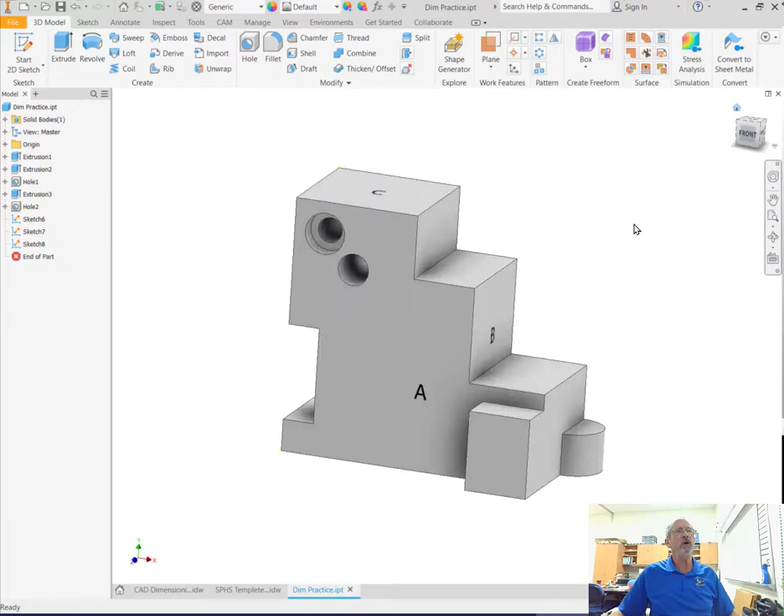Now, when we do datum dimensioning, we want a primary datum. So this bottom line here is our primary datum. That's the line that we always come back to when we dimension. And we're going to do what we call datum dimensioning here. Datum dimensioning is much more accurate than what would be called chain dimensioning. Chain dimensioning is used quite often in civil engineering and architecture, and it's one dimension right after the other.

But it's not nearly as accurate because if you continually go on the plus side of your tolerance, you're going to wind up with a piece that's too big. Likewise, if you keep going to the negative side of your tolerance, you're going to have a piece that's going to be too small. So this is going to be that.

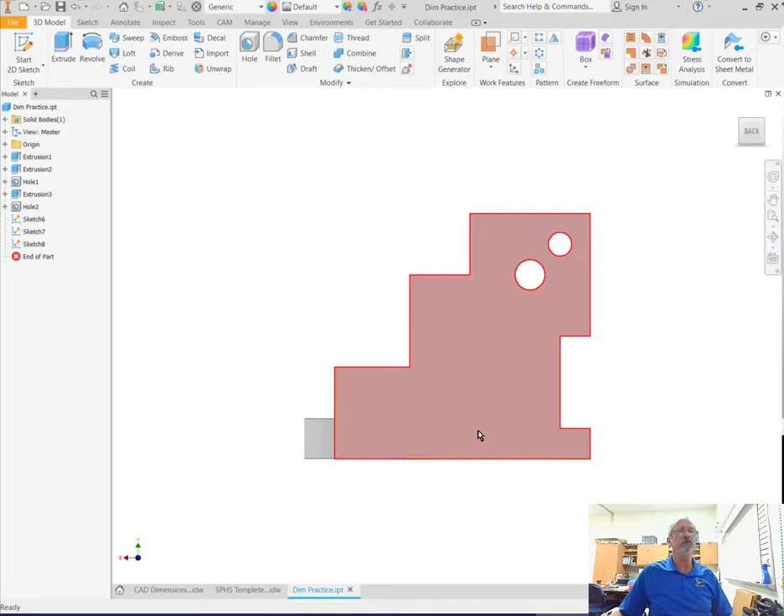So which view is our front view? Well, here, this shows some pretty good shape right here. And that shows some pretty good shape right there, but not near as much as the other view. And when we come over here, this shows just as much shape as the other one, right? So wouldn't that be the front view? And here, this is not near as much shape. So should we go with side A, which is here, or should we go with this backside right here?

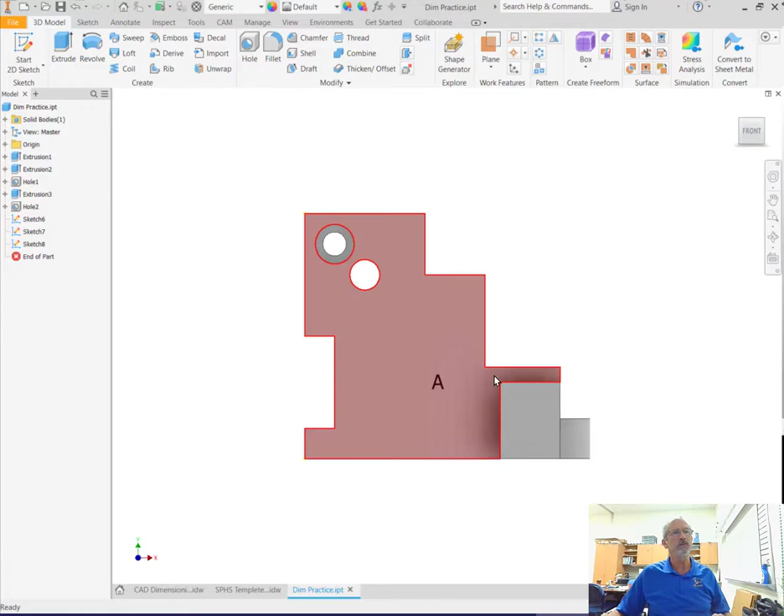I'm going to say that when we take a look here, if we're always judging things off of basically the front, the top, the right side view, unless there's really a reason, this takes us in a natural resting position. It's the largest area. It shows the most contour, okay? And it shows this piece on the front where the backside does not show it. It also shows the counterbore of this hole, which the backside does not.

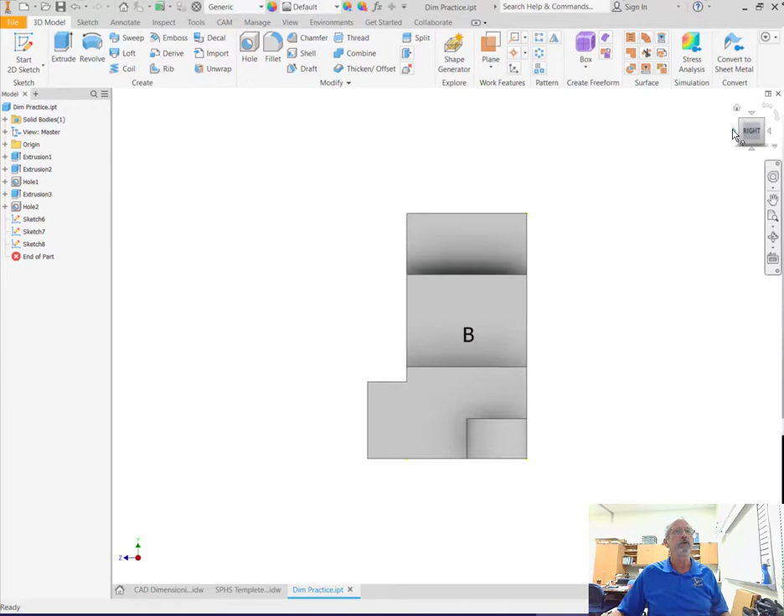But it does one other thing, okay? When we go to the right side view, we have very few hidden lines. So when we go to this view right here on the back side, if we went to the right view of that, we would have a lot of hidden lines over here. So that's why we're going to go ahead and select this as our front view.

It's a really good reason to take that as our front view right there. So let's go into our template here, and we're going to go ahead and do our base view here, and we're going to bring that in. And what I'm going to do is I'm going to go ahead and place the top view, and it really doesn't matter where we place these.

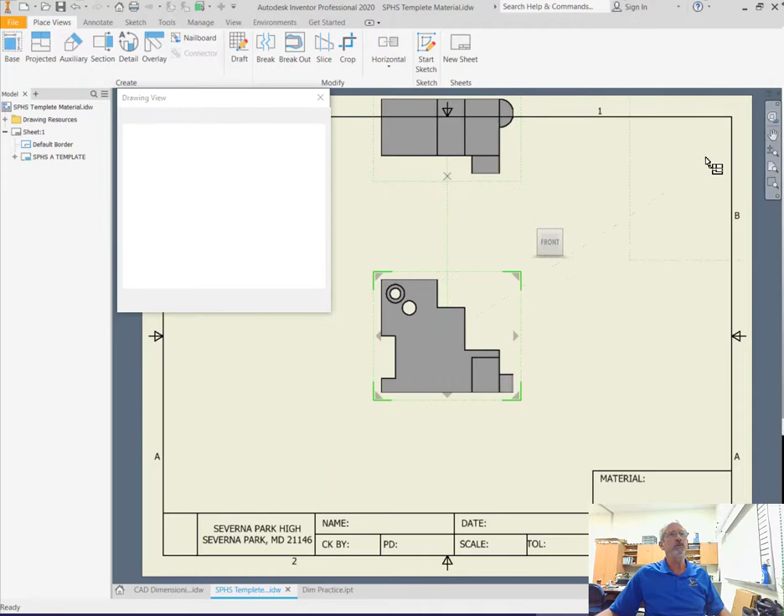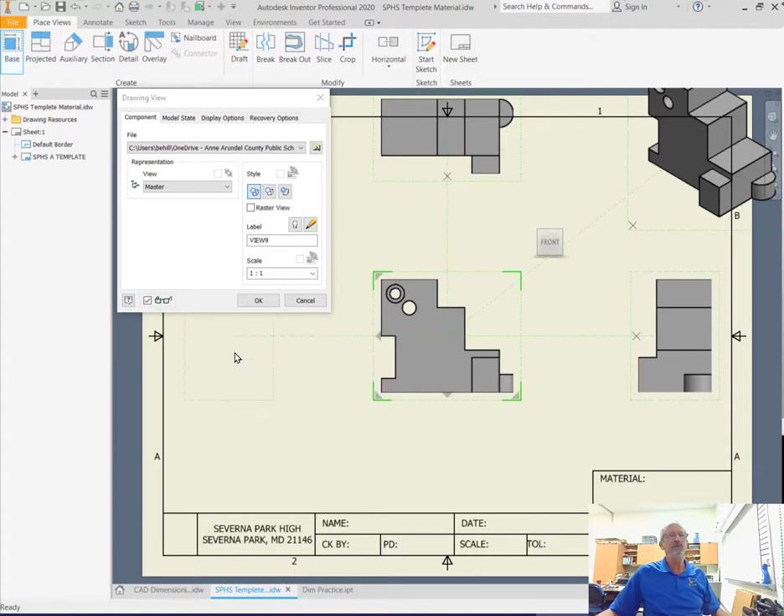Notice we're going to do a top view, an isometric view, and a right side view. And notice how Inventor allows us to do that. Now, I don't know whether it does that with Pro E and with SolidWorks, but with Inventor, it's really pretty cool. All right, so we're going to drop those in there, and we could do a left side view if we needed, or a bottom view if we needed. We're not going to need those for right now. Let's just put these three basic views in with the isometric view and click on OK.

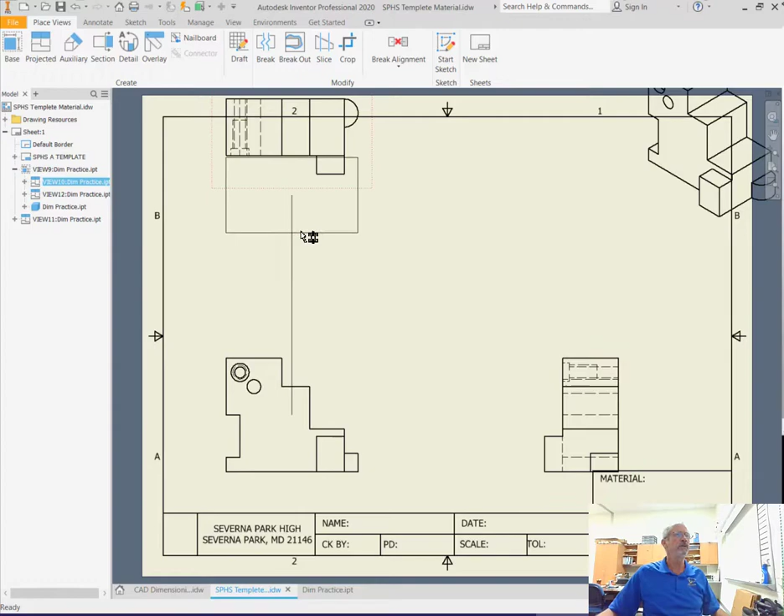All right, now once they're all in here, the master view is the front view. That's the first view that we put down. Now you can see here, because I've got my materials here, I can move up and down with my top view, but not left to right, because the master view is the front view. And the same thing with the right side. I can move it left and right, but I can't move it up and down. So we're going to have all the dimensions that we're going to need here. This is going to be kind of tight.

So what I'm going to do here, I'm going to bring this isometric view in here, and actually I'm going to leave it out here a little bit. But I'm going to get these red marching ants around here, and you can see where my cursor also switches to a cursor with kind of 4 funky squares on it. I can right click on that when I get to that point, let me get in here again. I can right click on this and I can edit this view.

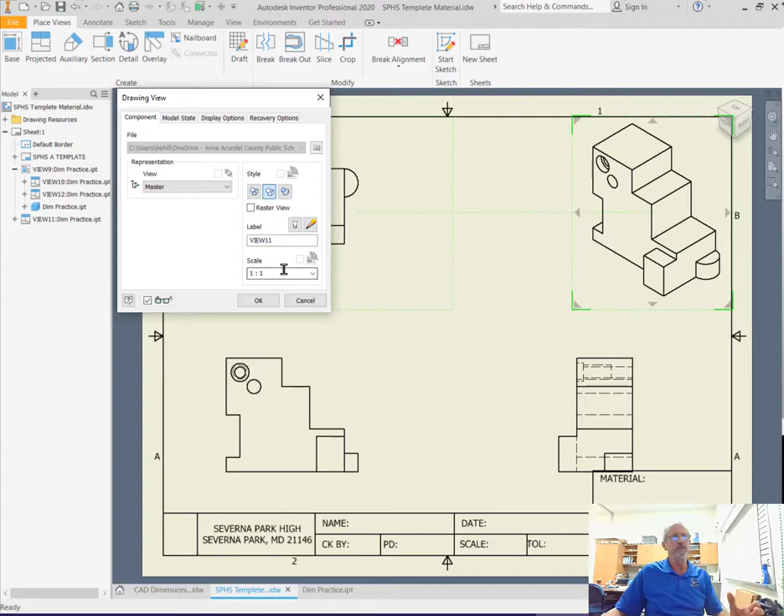Okay, so with edit the view, this is pretty dominant right now, and really the manufacturer doesn't need to see that, so I'm going to make it 3/4 scale. And just for kicks and giggles, I'm going to go ahead and make it shaded, because sometimes it just gives it a little bit more contrast and you're able to see that. So we're going to pop that up here, and I'm just going to leave it here even though it's overlapping. We should never overlap that border area, but I'm going to make this into a B-size sheet of paper.

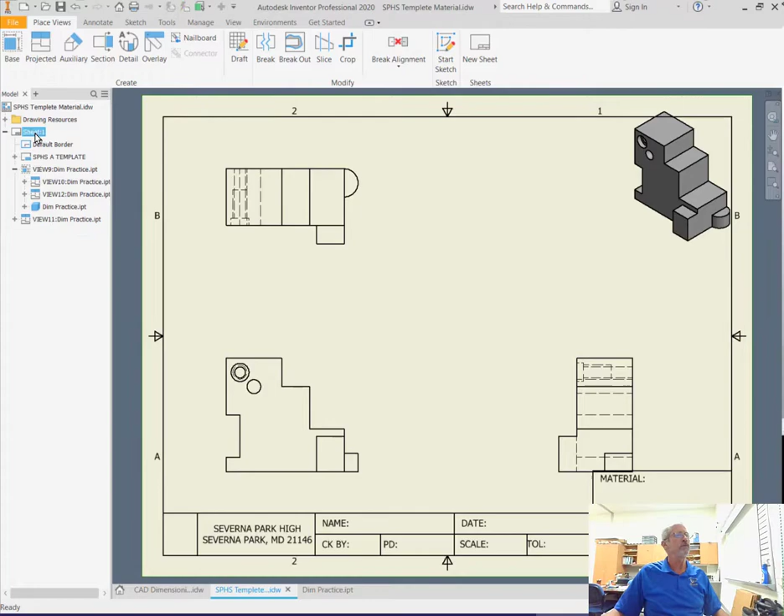So we're going to go up to sheet 1. I'm going to right click on sheet 1 here in the browser bar, and I'm going to go edit sheet. And I'm going to change this from an A to a B-size sheet of paper, and I'm going to click on OK. Now we can bring that up.

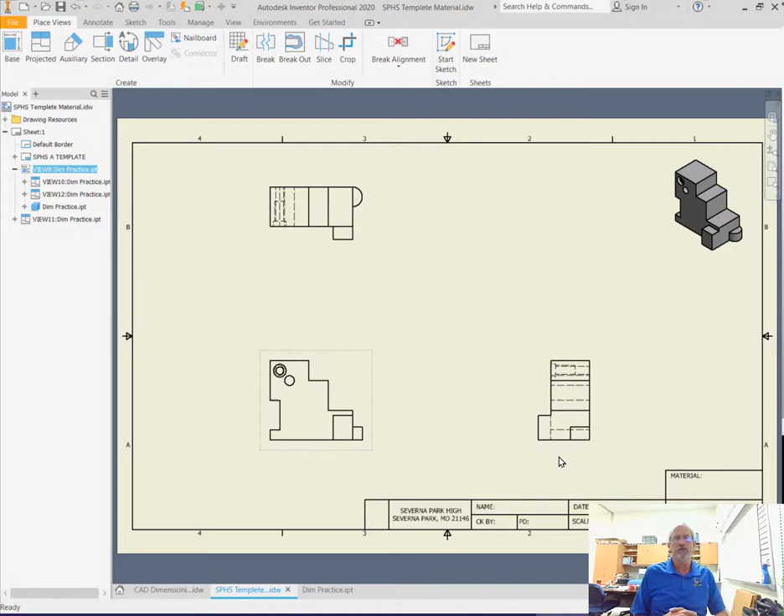Now, when we're drawing in industry, we always draw full scale or larger when possible. Now, it's not always possible that we draw full scale or larger. Obviously, if we're drawing a car engine, it's not going to fit even on an E-size sheet of paper and still get all the dimensions in there and still get all the other views that we need. So we have to scale that down. And sometimes that's just what we need to do.

All right, so the first thing that I always tell all my students to do is that you need to add your basic annotations first. Now, if we needed to, we could alter these views here. We can change these back and forth. We can delete these. We can even come in here and edit this view here. And when we edit that view, notice that the view cube comes back up here, and we can change this sucker all the way around, all over the place if we wanted to. All right, we're not going to do that right now because we've got to set it up.

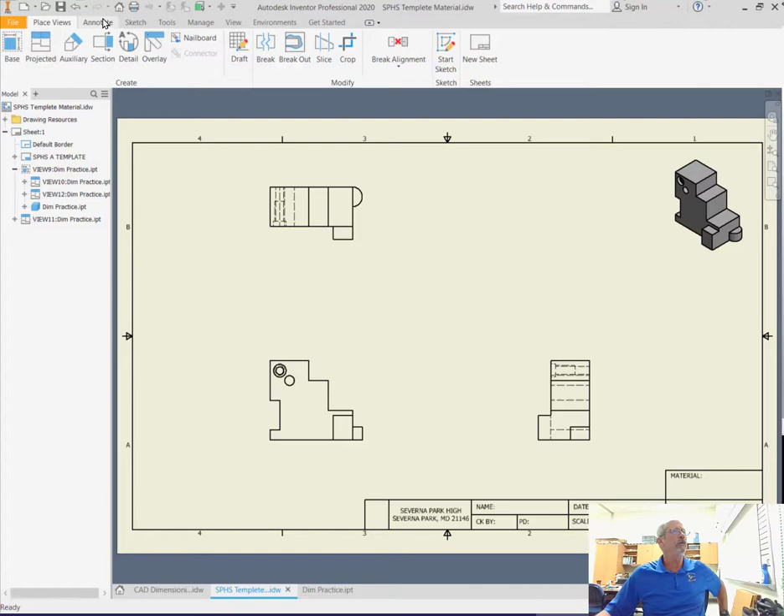So up here on our menu bar, we're going to go to annotate, and it's going to bring up a new set of ribbons and new panels up here. So we have a whole bunch of different panels up here that we can do a lot of different things with, which is pretty cool.

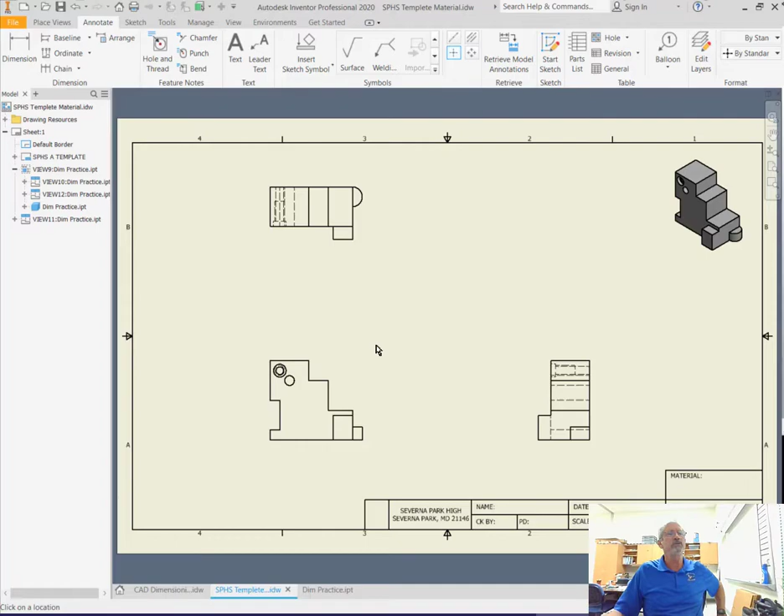But here's our basic dimension tool, and we have some other annotations up here. I always start with my students: always, always, always add your center lines first. Okay, so I'm going to zoom in here. Now, one of the things you've got to be careful with when doing the center lines is that your center lines always go an 1/8 inch past the object.

So if you take the center line piece here, notice that I went to the center, but it's not going outside this diameter right here. Okay, so I'm going to undo that, Control Z that off. Because that didn't go past that 1/8 of an inch, we need to come back in here. And remember, Control Z is your friend. Control Z is undo. If you hover up here, you can see Control Z is the hotkey. It's always in parentheses there, right?

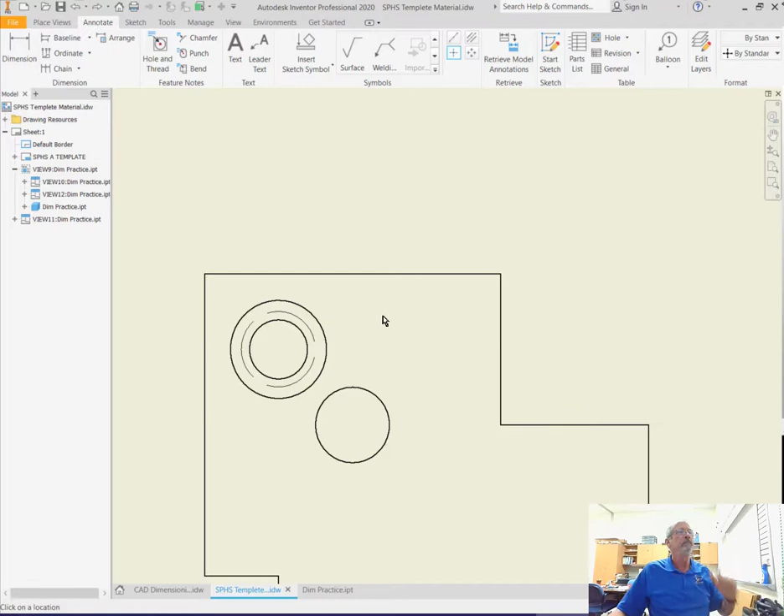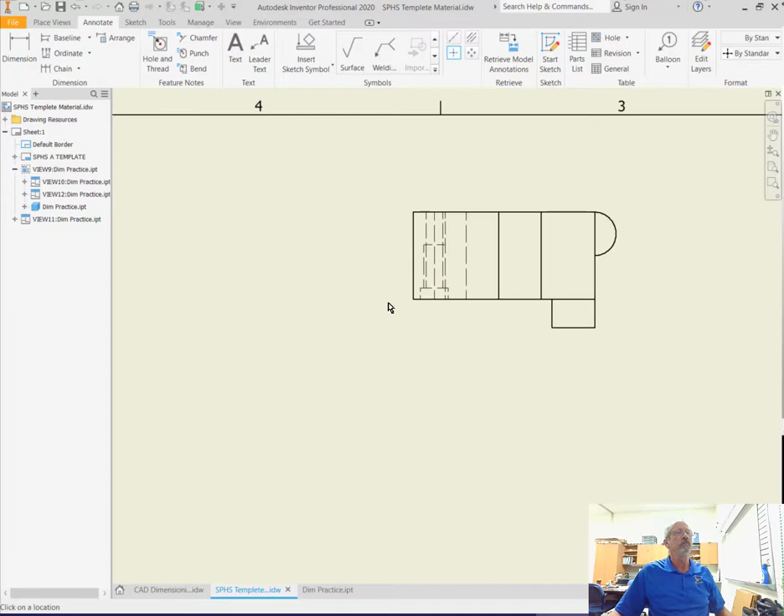So I'm going to come back over here, and I'm going to touch the outside of this circle right here. And now notice that the center mark comes outside of that outermost circle. And I'm going to do the same thing here. Notice that this is a little bit different only because this is a fairly small circle. Okay, now we also need to go into the other views and put in our center marks in here.

Now here we've got one coming right down through the center. Notice that we've got a hidden line. Well, a hidden line takes precedence over a center line. So we're going to leave that one alone, but we do have a center line that's going to go through here. And we've got to make sure that we do the right thing on there, so we've got to make sure that we select the correct lines.

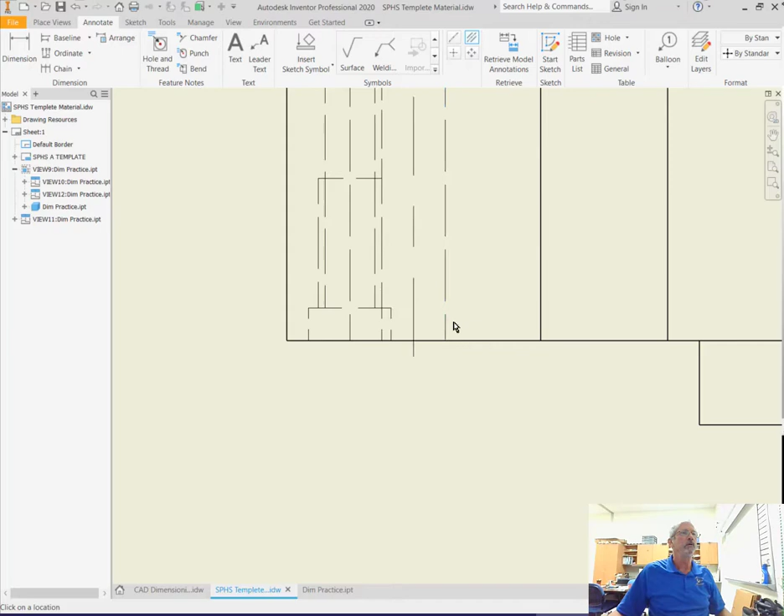Now, one of the ways that you can select the correct lines here is that you know that these kind of line up a little bit together. So we're going to go here, and here, and we're going to put that center line right on down through that slot right there. Okay, now I'm going to exit that. I'm just going to make sure this did not get pulled up all the way, so I'm going to pull that up an 1/8 inch past the object. Remember, the center lines always go an 1/8 inch past the object that it designates.

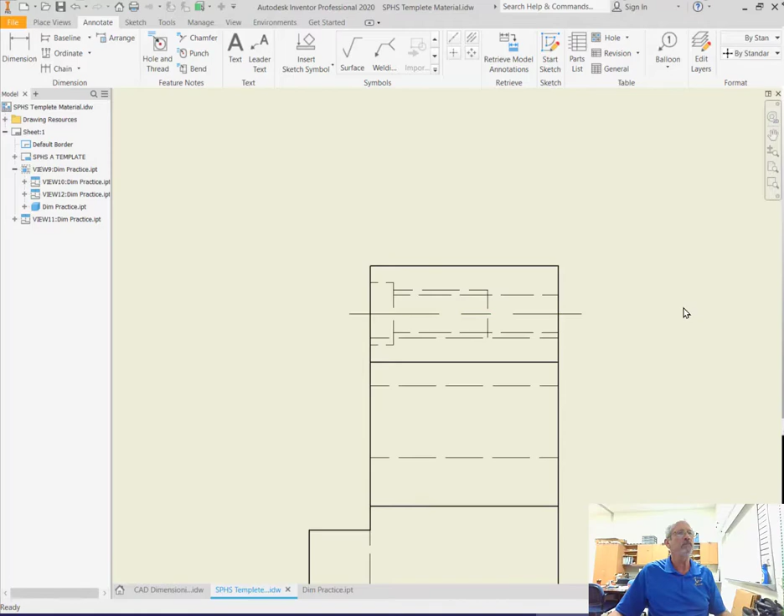So I'm going to come back in here with this centerline one. I'm going to go to the inside because this will allow me to get that center line at least out here. I'm going to escape that tool, and again, I'm going to pull this out 1/8 inch past that object, or about that. You don't need to make it exact. Back in the day when we used to do this by hand, we weren't really worried about that.

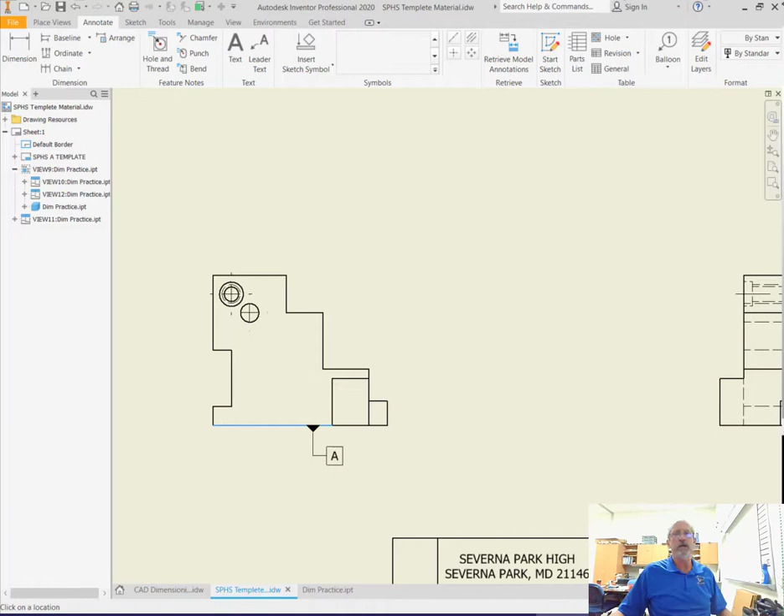Okay, so we always want to start off with our primary datum. Now, if we really wanted to, in the real world, we'd come in here with a datum, and we would come down here and say, okay, this is going to be our primary datum, and we could drop this in here and say that is our datum A, all right? And we could come over here and bring this in here, drop that into place, and this now becomes our datum B, and we could click OK there.

And then we would come up here, and we try to put it in a place where we don't have to worry about it too much, but we would drop this into place, and this would become our tertiary. So we've got our primary, our secondary, and our tertiary datums. And this just allows us to work off the correct datums and to make things very accurate. You don't have to put those in there for something as simple as this, but it is good practice.

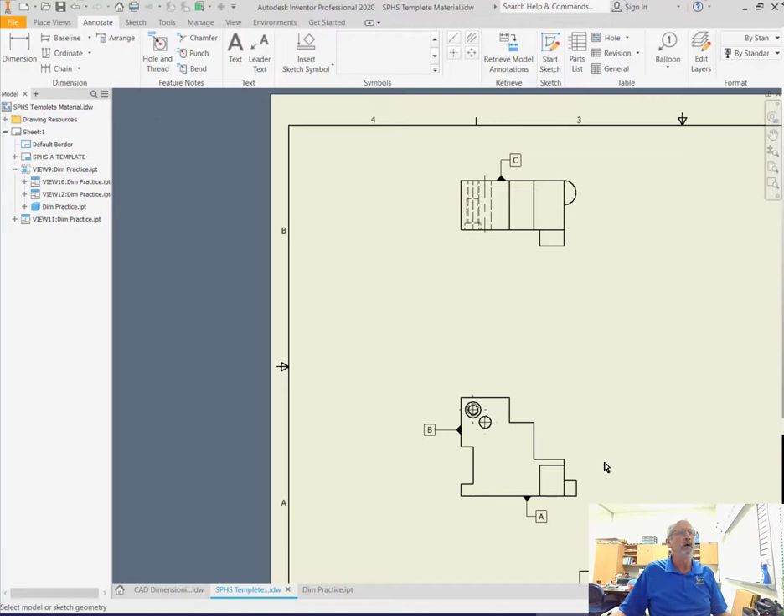I'm going to show you two different methods of putting in datum lines here. I like to start off with my primary datum. And when we do that, what's really important is to understand that we're always dimensioning in between views when possible, but we're also dimensioning to the shape, which is more important than dimensioning in between views.

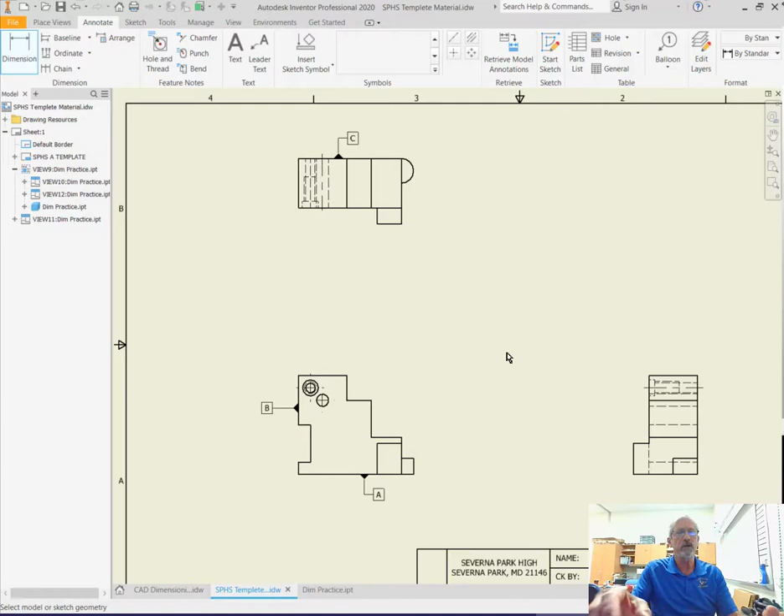Now, when we consider in between views, even if we have a left side view, a bottom view, a back view, we're still trying to put our primary dimensions in between the front, top, and right side view. In between the top and the right, this is considered in between views. It is not considered dimensioning in between views to the left of the top view or to the bottom of the right side view.

Okay, so I've got my dimension tool here, and the first thing I'm going to do is come into this object here. You could always start off with something a little bit simpler than this, but there's a couple of different methods. Now, we have to be careful that you're not getting the midpoint right here. See that little green dot there? It's a node. We've got to be careful that we don't pick that up.

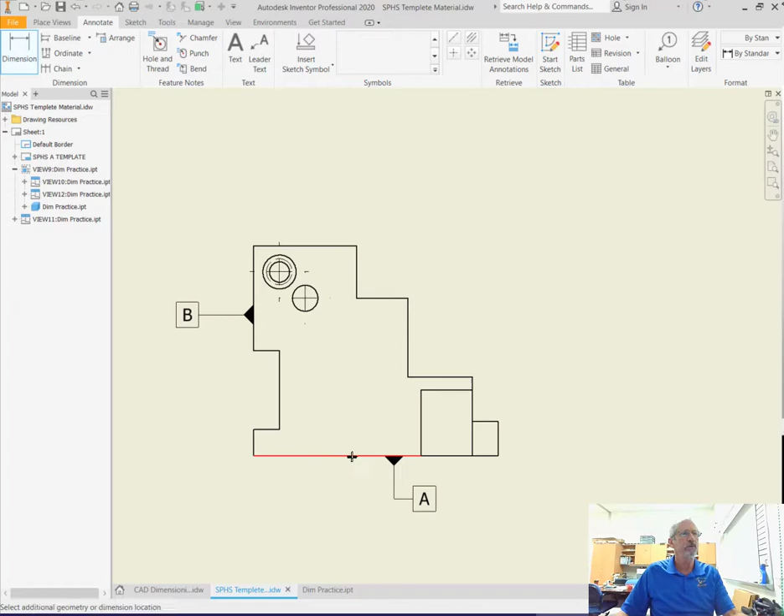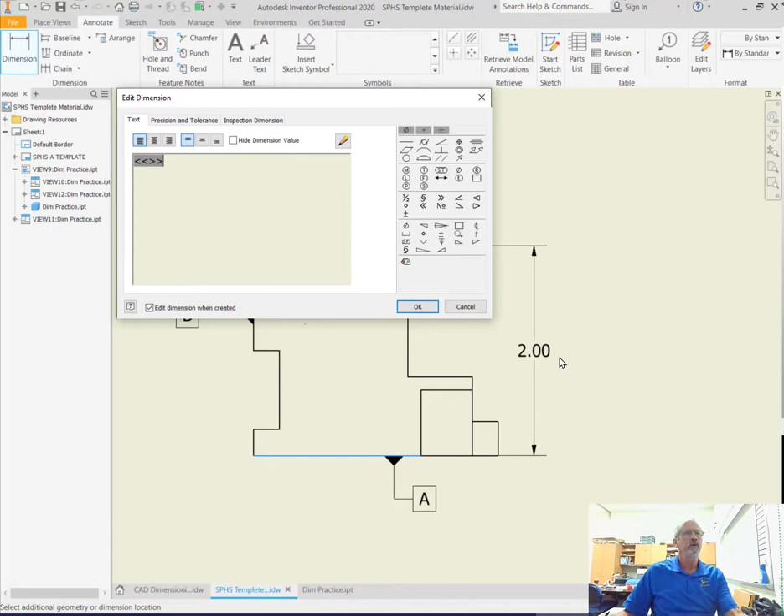I'm going to do something wrong here so that you can see what happens, and then I'm going to do it correctly. So if I click over here, notice that it starts right here, and then if I click up on this line and bring this out here, I usually come out 2 snaps. There's one snap, there's a second snap, and I drop that into place. It gives me plenty of room for my numbers on what we call a unidirectional layout of our dimensions. Unidirectional means all dimensions are read from the bottom, and I can just click OK here.

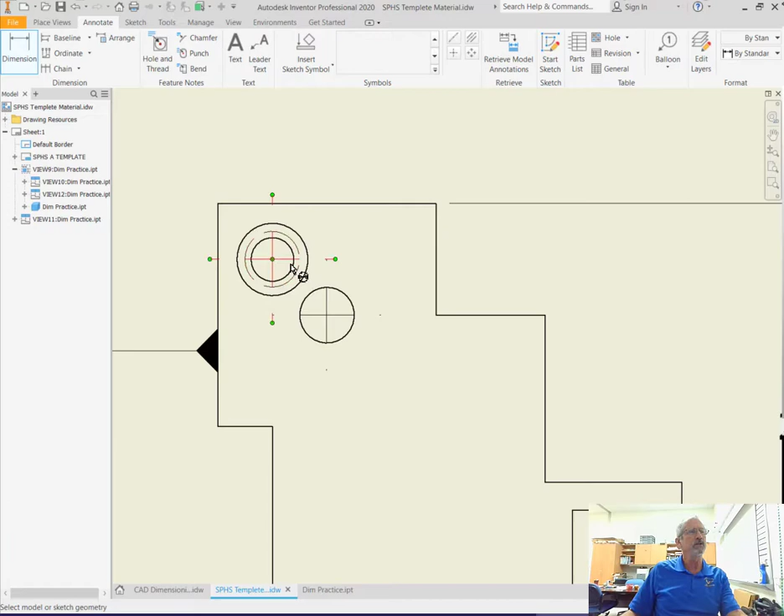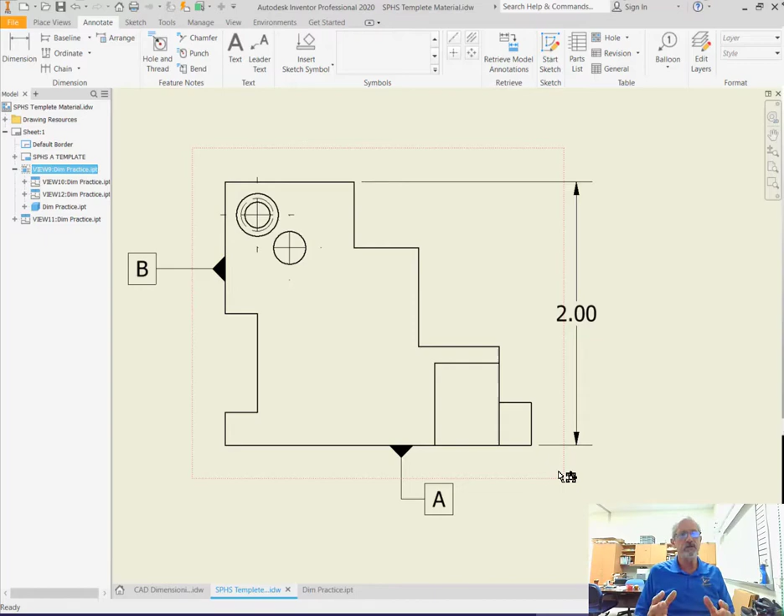But here's our problem: the extension line should always be 1/16 of an inch away from the object that it is dimensioning. Notice down here that didn't happen. We can take care of that by selecting the object. We have to escape out of the tool, then select that particular dimension, and drag and drop it here. Now notice I've got the 1/16 inch gap right there. That makes it much easier so that we don't confuse the object with the extension line, and it really helps out the manufacturer.

Remember that these drawings are not for you at all. If the manufacturer doesn't make what you want, then it's your fault that you didn't do a good enough job of doing the drawings, the design, and laying these dimensions out.

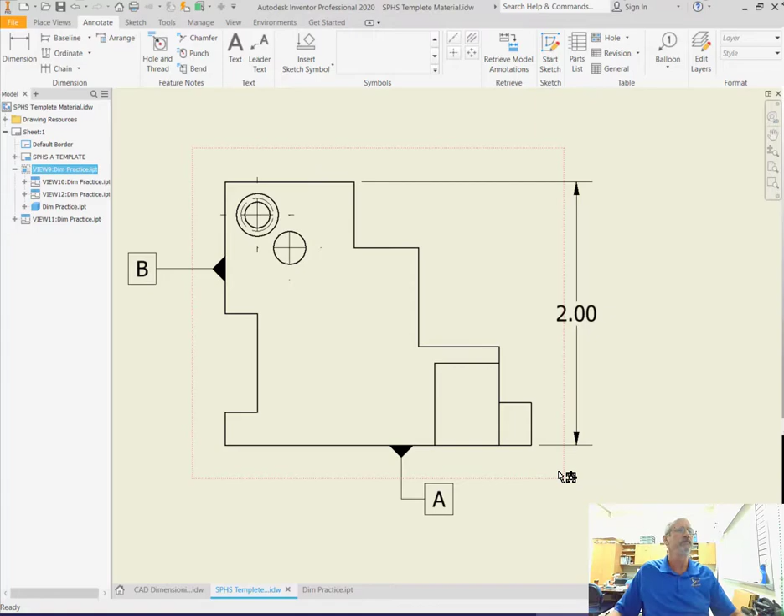I'm going to delete this and show you another method. Because this has just a straight line here, if I just get this line red, it's going to dimension just that line. I've got to be careful that I don't go for that center point there. But I can bring this out here and drop it just like that. So that's one way. The other way is I can start here. Notice that dimension was on the bottom.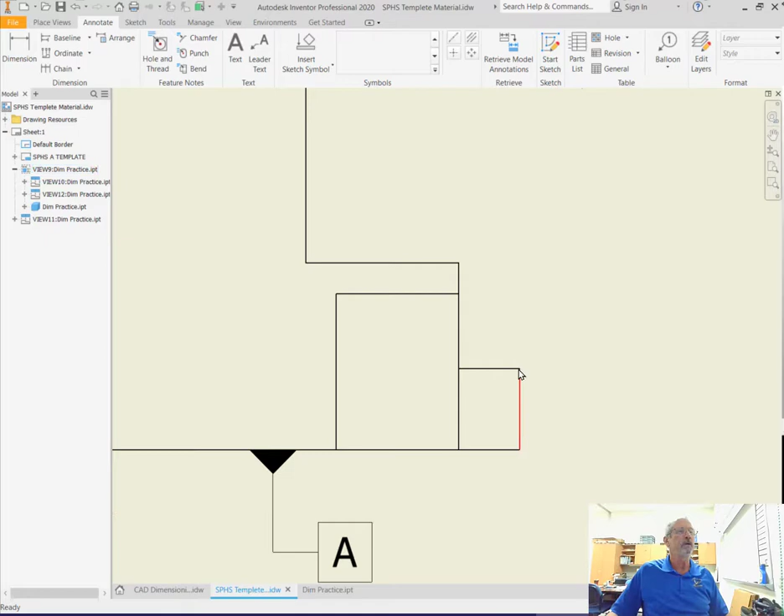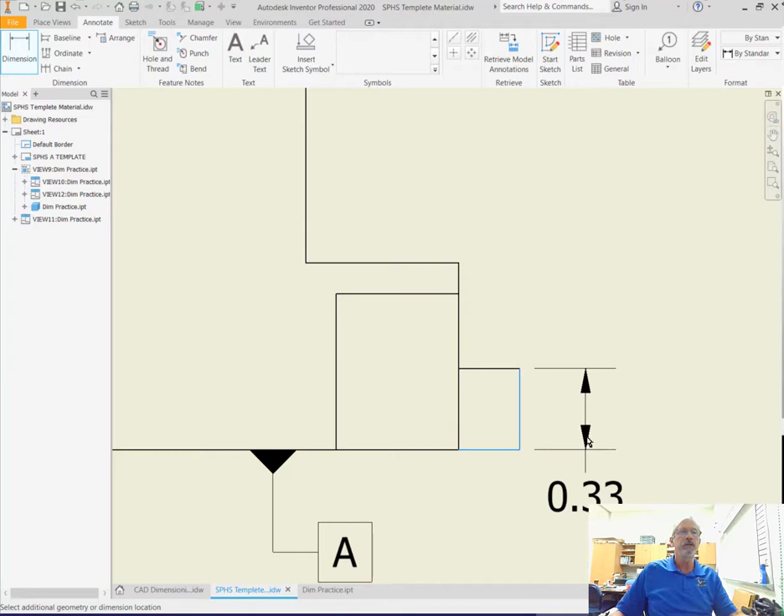If I go from corner to corner, notice that I started on the top line, and that dimension came on the top. If I do that again, and I can hit the D key to do that as well, that's a hotkey, notice that I started at the bottom this time, and the number came to the bottom. So again, just hit the D key. Notice that popped up right there.

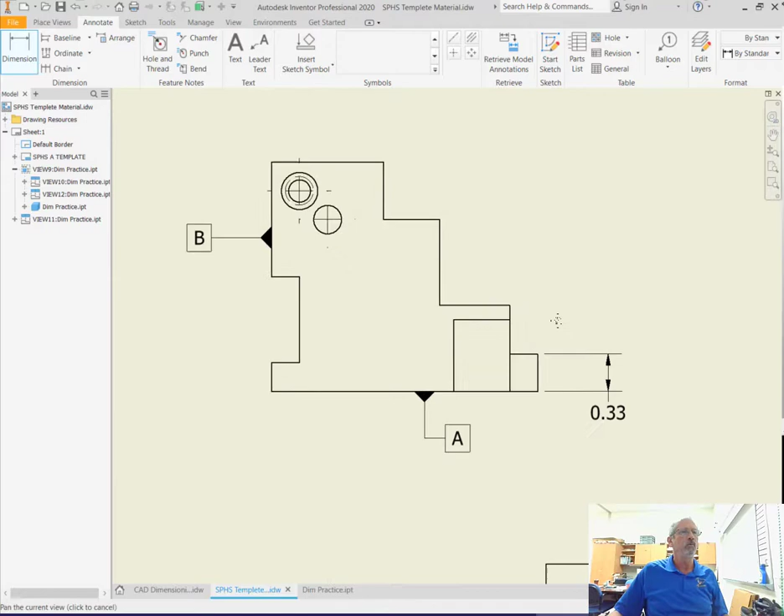I hit my keyboard. I'm going to come out 2 snaps here. That really gives the manufacturer room to see what's going on. This is really important when you're working with somebody. You don't want to get a call from the manufacturer late at night. So I always start off with my detail height, and I go very systematically: detail height, overall height.

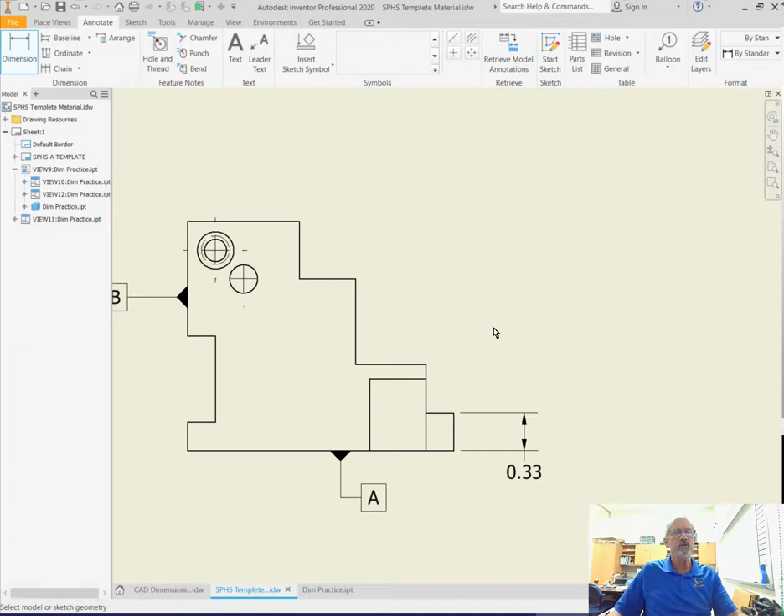So I always do my heights first, and then I go to my secondary datum, which would be my widths, and I'm going to do my detail widths and then my overall width. And then I finish with the tertiary datum, which is the depth.

Okay, so here what we're going to do is we're going to say to ourselves, okay, so what's the first height? There's our first detail height right there. All right, what's the next detail height? And we've got to zoom out a little bit on this because we've got to remember that our front view gives heights, but also our right side and left side view give heights. So we have to make sure that we're deciding on which is the best views to do those heights with.

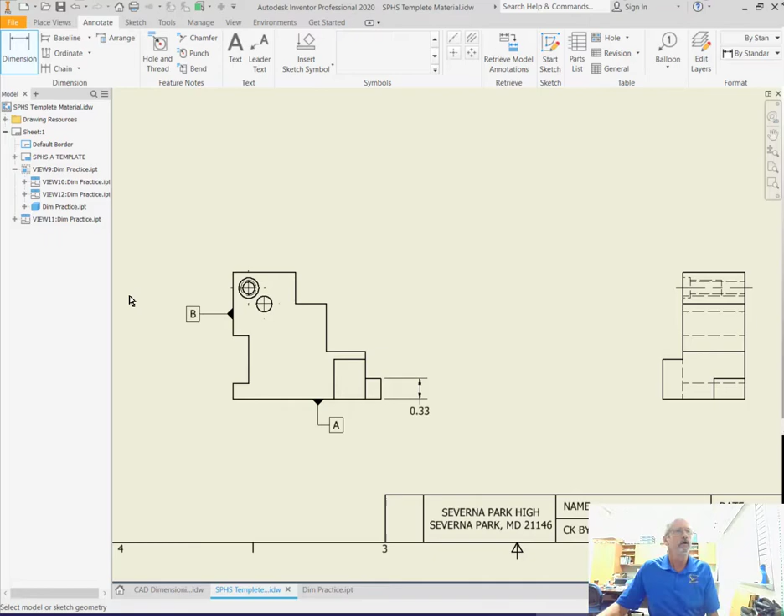Okay, so our next highest thing that we're going to do is going to be this piece over here. Well, this is over here. And I'm not going to bring that dimension over here, which, although it's in between views, the shape is over here. So I'm going to move over here, and I'm going to bring this over, and I'm going to come out 1 snap, and there's my second snap. I'm going to drop that into there.

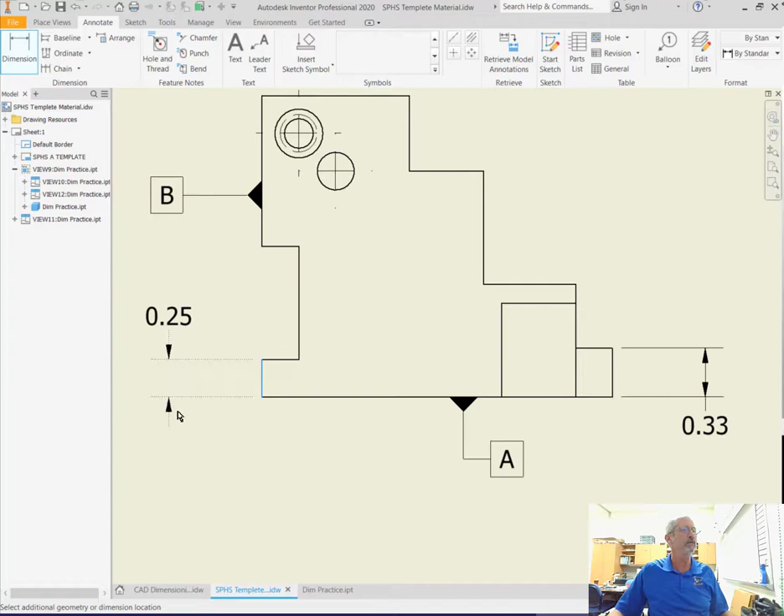All right. Okay, so now we have this part of the object right here, a rectangle right here. Now, the thing is that when we take a look at this rectangle right here, does it go in or does it go out? Well, we can see from the top view that it comes out, and we can see from the right side view that it comes out. Is there shape here? It's a rectangle. But again, we don't know whether it goes in or out. If we come over here on the right side view, we see that this comes out.

So what we're going to do is we're going to dimension this height over here. So 1 snap, 2 snaps right there, or marching ants. Okay, I like to call those marching ants. So that puts that into there. So now we've got that detail height right there. We're going to move up to the next detail height.

And again, we look over to the right side view, and really this is going to be our best view here. So here we're going to go from corner to corner. And this is, again, where you've got to be careful that you're not coming down here to this corner because you're going to lose that gap. So you're going to come to the outermost corner. All right, and again, I'm going to go 1 snap, 2 snaps away.

And the default for Inventor is to go 1 snap away, but the problem is if I made this a default of 3 decimal places, which is pretty standard in industry when we're dealing with inches, then there wouldn't be very much room for the dimensions to go in there, and it would make them too jumbled. So I like to go out 2 snaps.

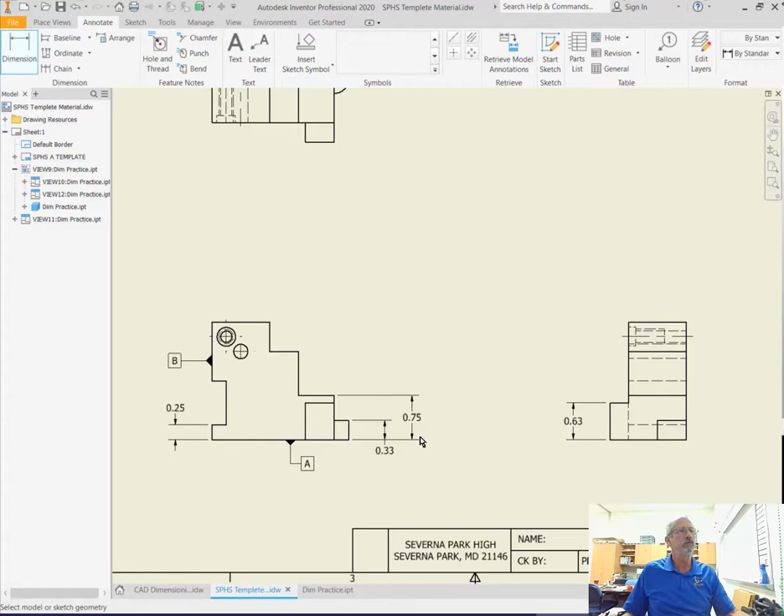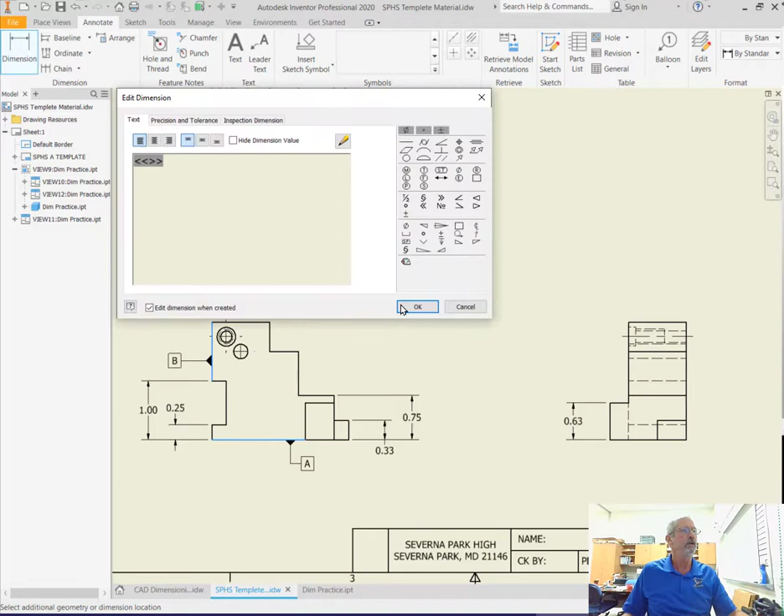Okay, next height, we're looking at both views. Next height is going to be this piece. And this piece, again, we're going to dimension from this corner to this corner. We're going to bring it out, and we're going to bring it out 1 snap past that point. So you can see here, just 1 snap, you can see how those 2 overlap, right? So we're going to go to a second snap right there and drop that into place. All right, we're getting there, aren't we?

All right, so we're going to come back in here. We've got to be careful because we've got some other things here. Now, we've got these 2 right here that are the same height. So what I'm going to do is escape my tool. I'm going to grab this node, and I'm going to bring it over to within a 1/16 of an inch here. And I'm going to just slide this out here a little bit too so that they can see the center marks a little bit better. I really don't like how this got set up there.

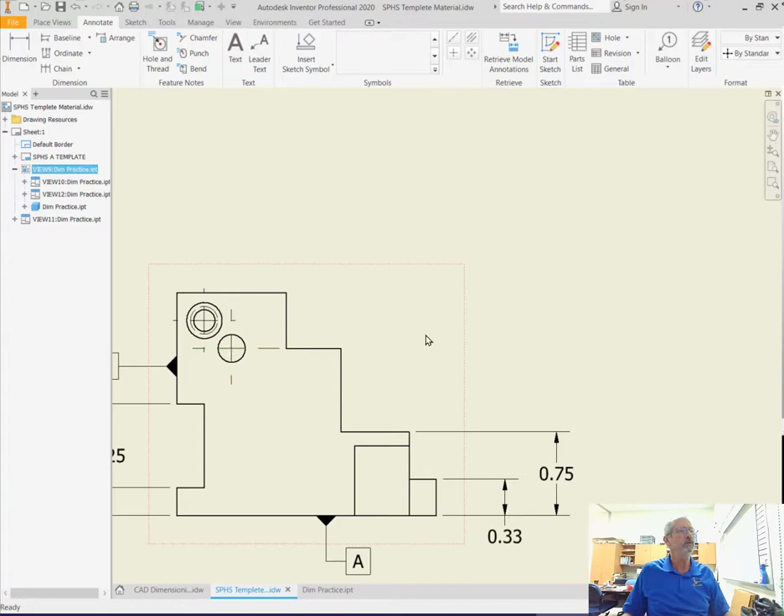But you can see how the center mark comes out, and it stops right here at this object line. And by leaving it a 1/16 of an inch, what it's saying is that, hey, these 2 line up together. They are in line with one another so that we can dimension those, and they will have the same dimension. And right out, we're going to go 1, 2 snaps back with our 1.5. We're going to drop that into place, and we're good to go there.

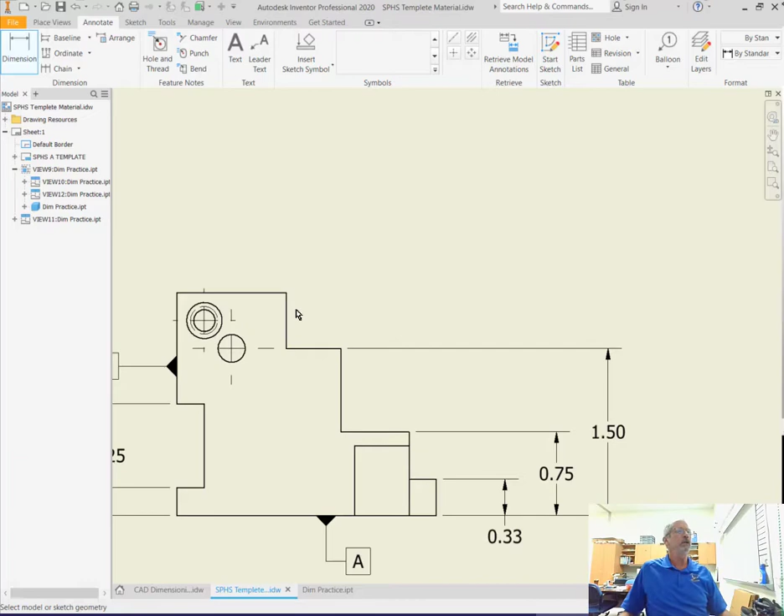All right, so now we have another height come in here. Now, this one we could either go out here or we could go over here. Now, if you come out here, technically, we should not go more than half the face of the object. So what we're going to do is we're going to bring this dimension out over on this other side right here. So we're going to start on this corner, and we're going to go to the center mark here, and we're going to drop this out over.

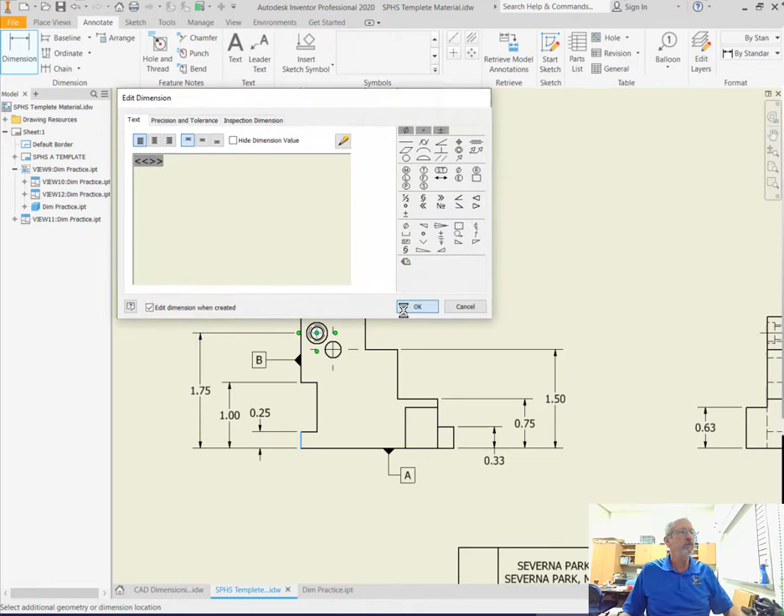Whoops, out over there. And if it drops down and you don't get it exactly right, not a big deal. You can just grab the extension line, the dimension line rather, and just drop that into place right there. And it works out really well. And you can see that I still have my datum out of the way here, and I have all those labeled.

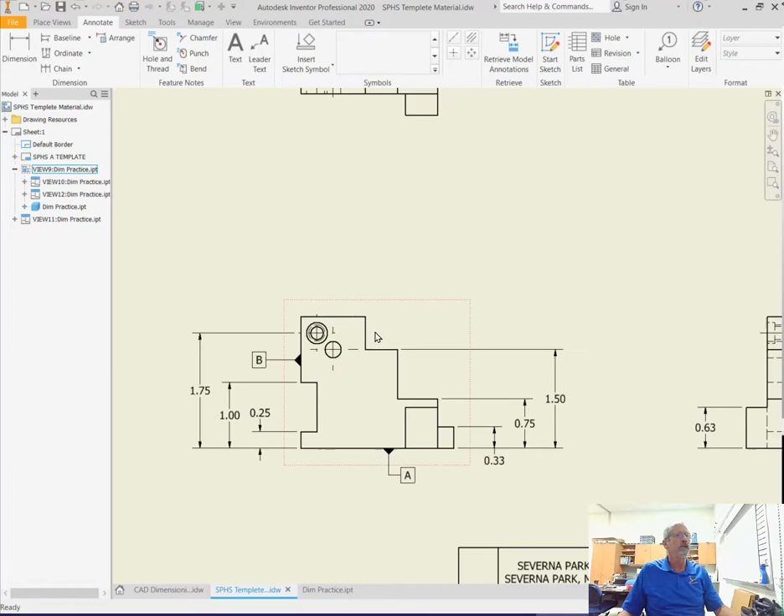Okay, so now we're going to go to our last height. That's going to be our overall. We're going to check our right side view and make sure that all the shapes are where they're supposed to go and all the dimensions are where they're supposed to go according to shape. And we're going to double check everything. It looks great. So let's go ahead and do our overall height. And we're going to bring that in, and we're going to go two snaps out and drop that into place.

And when we take a look at this, we go back and we just double check. Okay, we got height here, we got height here, but we got that over there. We got height here, we've got that there, we got height here, we've got that there. We got a height here, but that's being taken care of by this. We got a height here for our center, that's being taken care of by that.

Remember, we have to locate those centers. We have to know where we're going to put our drill bit. Our drill bit goes to the center, and so therefore it's very important to locate the center point of that. All right, so now that we have all of our heights done, we've worked off of our datum point here, and this bottom line right here is our datum line. So again, we're going up 33 hundredths here, we're going up 75 hundredths here, we're going up 1.5 and 2.

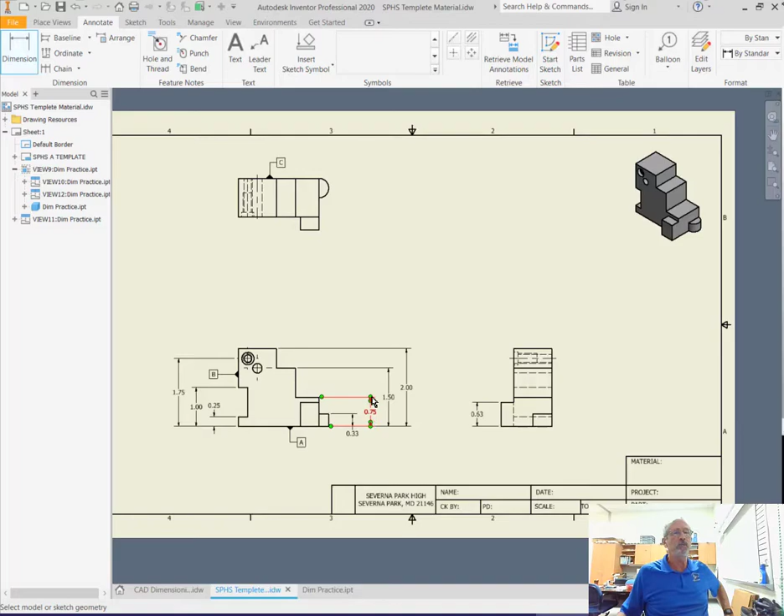And so the reason that this is so accurate is that if we're plus or minus, let's say 5 thousandths of an inch, then we're only 5 thousandths of an inch big here. If we went from this point to this point, and we were plus 5 thousandths of an inch again, then we would be 10 thousandths of an inch off. But because we came back here to the starting point and came up here, maybe we're plus 5 thousandths, now we're only off by 5 thousandths of an inch. So much more accurate than doing a chain dimension. And again, this bottom edge line right here is called our datum line.

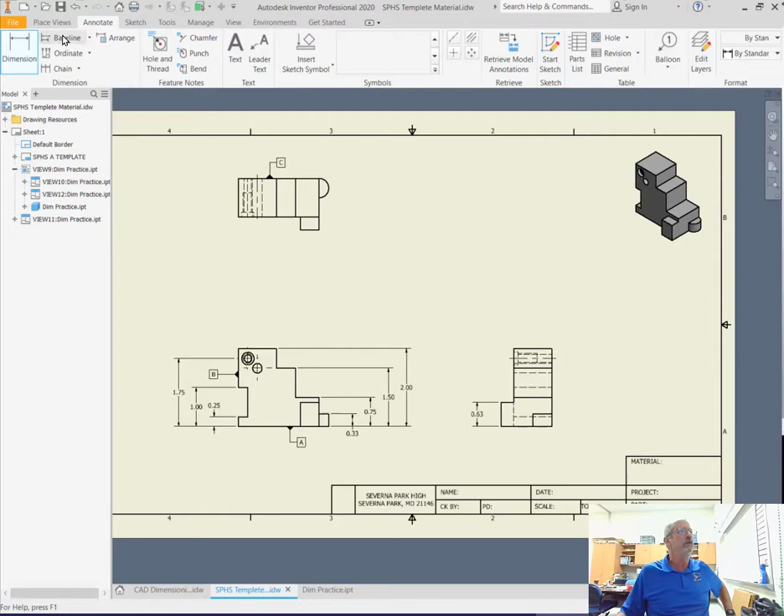Okay, so let's start another datum up here. I'm going to show you a new method that's kind of cool, and it's called baseline, baseline being the datum. I'm going to make sure that we can see the top view as well, because we're going to zoom in and out of here. Now again, we're not going to dimension this piece because we can see up here that it comes out. This is the shape up here. But all the other vertical lines, all the other widths are all going to be dimensioned down here.

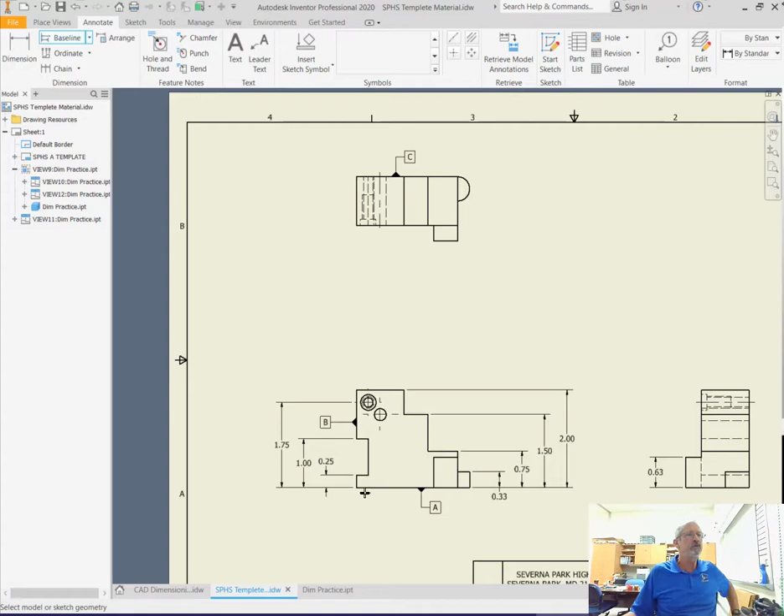Now the first thing that we see is a dimension down here. We're going to go back to our regular dimension tool because we need to know how big that slot goes in. Again, we're going to go from corner to corner, and we're going to bring this out. Notice that I started on the right side, and so the dimension stayed on the right side, so it didn't run into this arrow over here. So I'm going to drop that into place, and I'm going to click on OK.

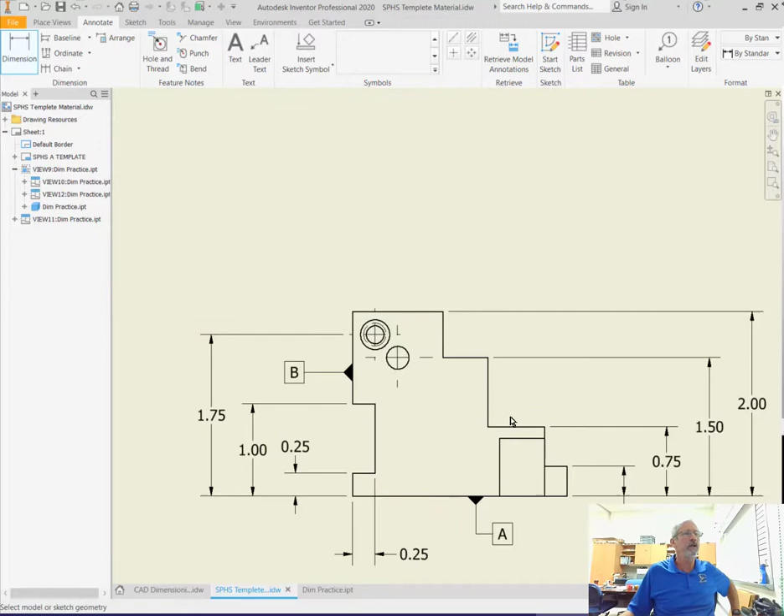And I also know that because this has got shape up here, I'm just going to come up here, click on that and come down 1, 2 on that. And we're going to click on OK for that. Okay, so now all the rest of these lines I can come over here and take care of here.

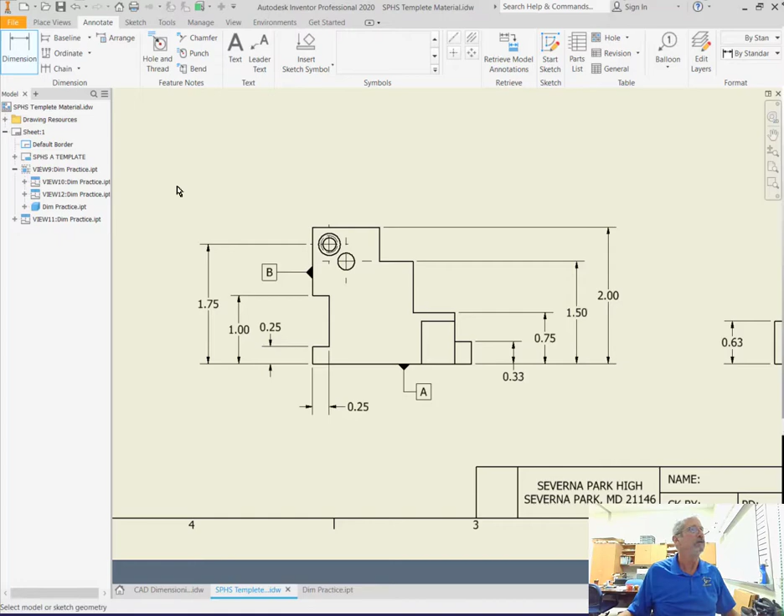Okay, so we're going to come in here. We're going to go ahead and do these widths. Now, I know that I've already done all the widths that I need to do, so I'm going to come in here and do baseline. And this is kind of a neat tool. I'm not real keen on it only because I don't think it puts enough space in between the numbers. But for doing widths, it's fine. Doing heights, it's not so good.

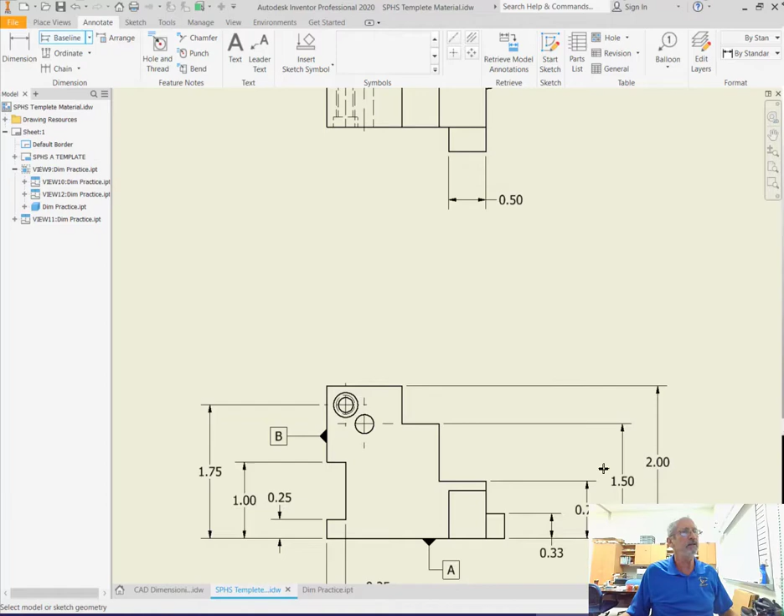So we're going to come here, and all we're going to do is select these lines. So I'm going to select that center point. I'm going to select that center point. I'm going to select this line, and I'm selecting any place where there's contour that needs to go up here. And notice that I'm pushing down on my wheel, and it becomes the hand. So I don't have to go up here and get my hand tool. I can just push down on the wheel of my mouse, and I can do that.

I'm going to come along here. And once I get all those selected, and I know that I have all selected, I'm going to come up here, I'm going to left click once, I'm going to right click, and I'm going to go to continue. Now, just because I've gone to continue, and just because I put these in, doesn't mean that they're going to go in the right place. But you see how they're kind of close together. They're only one snap away from each other. This is way too close.

The minimum distance, according to ANSI, is really 3/8 of an inch away from the object. And you can see that I've done that with this right here. And you can see how close these kind of get when you pull it off to the side, right? That doesn't work great. And that's why I don't like it quite as much. So I'm going to bring this out another snap up here. And I'm going to drop that into place. And you have to hit enter, or else it won't work. They'll all disappear once you do that. So you got to make sure you hit enter.

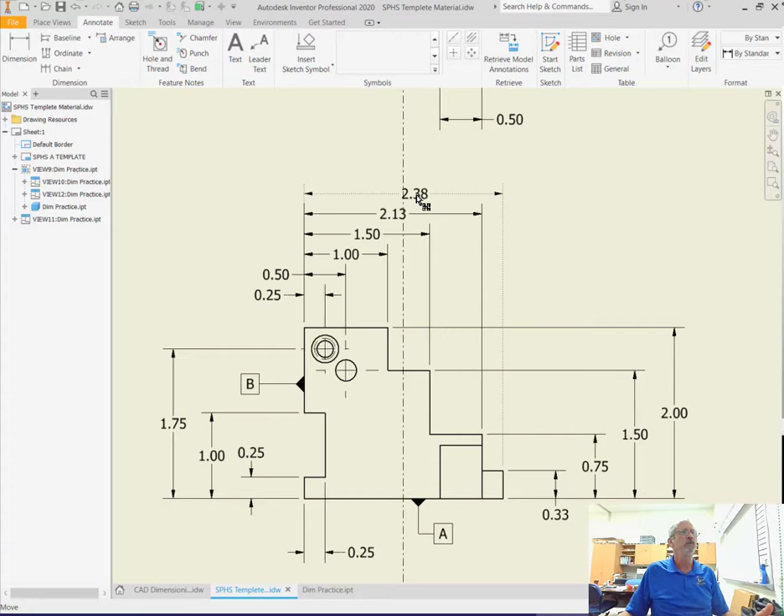But you can see how close these dimensions are compared to what I have over here with the two snaps. I just think it looks more professional. It's easier for the manufacturer, the machinist, whoever it is that's working on this, to really see that. You can see how these kind of stack a little bit close together, and you don't want these to be perceived as a fraction. And you can actually take these and move those. I'm just going to shift that just slightly over to the right. We try to keep those centered as much as possible, but we also want it to look neat and professional, and we want it to be very clean and clear as to where the dimensions go and how the dimensions go on there. Okay, so that's really super important right there.

So now, if we take a look at this, we're going, okay, well, wait a second. Look, the top view, that's an arc right there. So is this truly a dimension that we need? Well, no, it's not. And actually, we don't want them to be recorded as a dimension, because what the machinist is going to do is they can come along and go, okay, well, that's supposed to be 2.38, and they can take that block of whatever material it is, and they'll machine it down to 2.38 within tolerance.

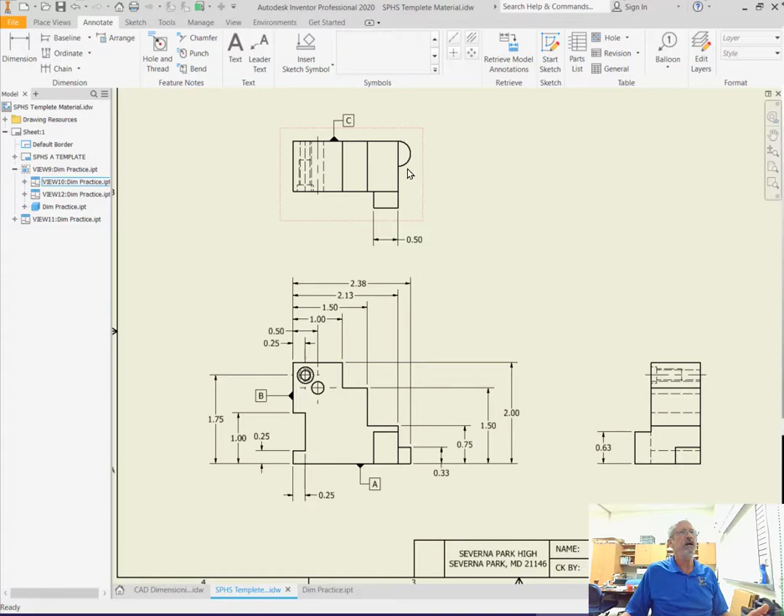And then they'll go, oh, I've got to do this arc right here, and they'll put that arc in, and if they make this too short or too small, that arc gets a flat space right on here. Well, maybe that's important and maybe it's not. Maybe that's important not to have a flat space there, but it's supposed to be nice and arched right here. You can see how it's supposed to be a nice arch right there.

So we don't want to see a flat spot on there, right? So what we're going to do is, sometimes when we have something that's got a lot of numbers that you have to add up, we'll make this what we call a reference dimension. So with this dialog box, you can see that we can add all sorts of different symbols, tolerances. This is parallelism, flatness, perpendicularity, flatness and straightness, and positioning, angle, diameter, degrees, and plus and minus, all those things that go into here, right?

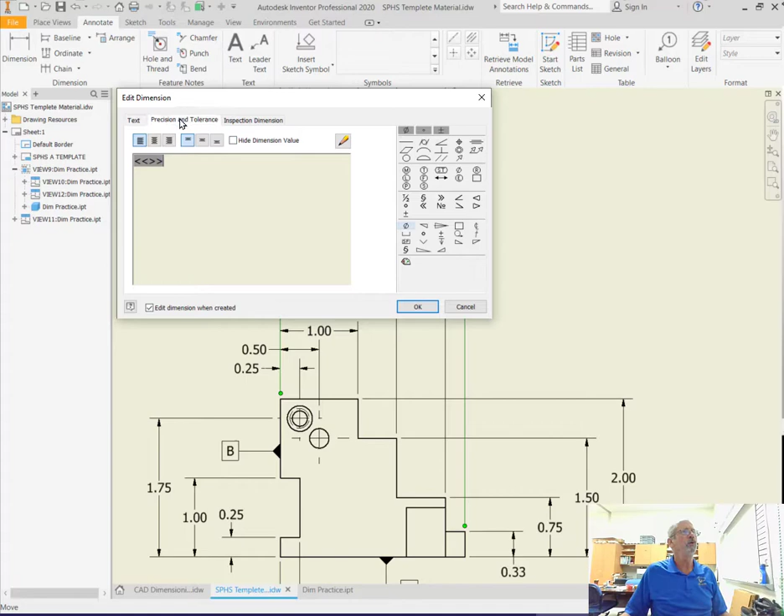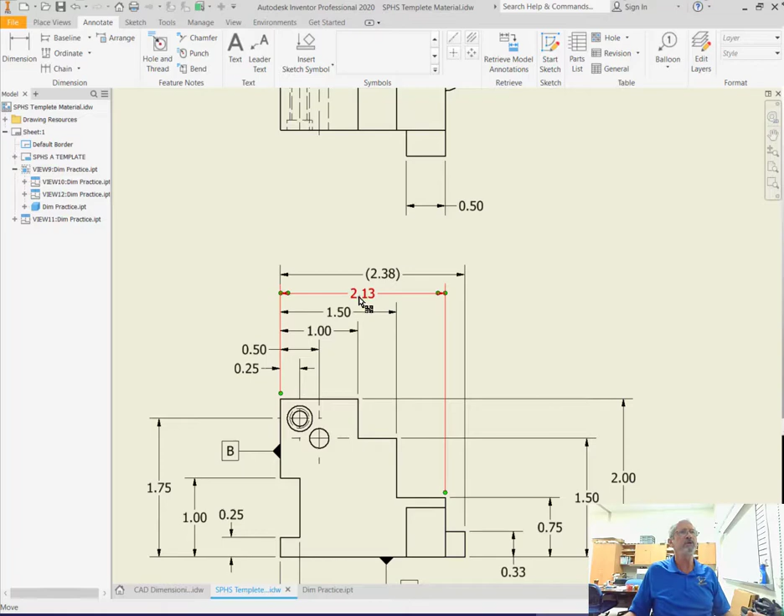So what we're going to do here is go over to precision and tolerance, and we're going to make this what we call a reference dimension. And we're going to click on OK, and look what it does. It puts parentheses behind that, which says, hey, you need this to be about 2.38 inches when it's finished. It should ideally be 2.38 inches, but that's not where we want you to dimension it to. We really want you to dimension this to 2.13, and then we want you to take this arc right here and make that a 1/4 inch radius. That's what's important right there.

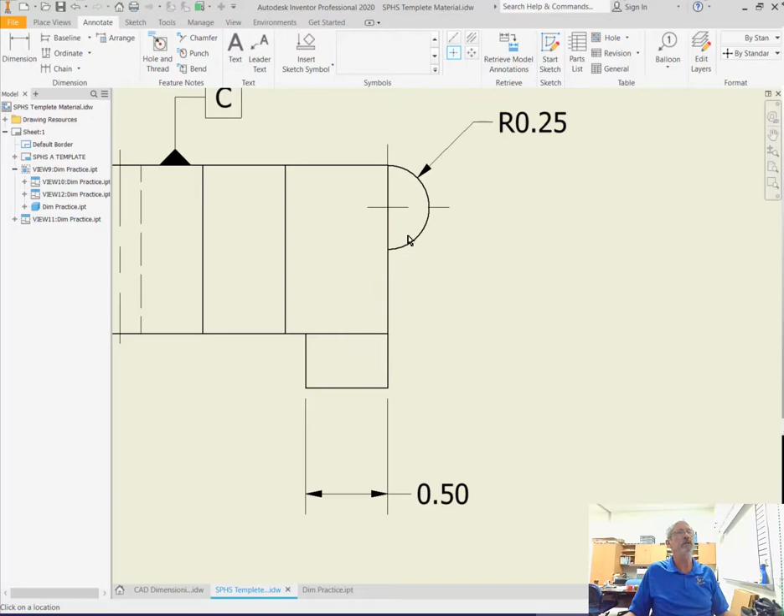Now here we've got this arc, and what we can do is drop in our center mark right there. You can see that the object line takes precedence over the center line right there. And we really don't need to do that. Looking at that right now, we're probably better off without it in there. So I'm going to take that out. I'm just going to delete that off. We don't need to dimension to the center of this because this is going to be tangent. We know that by putting just a radius up here, it is assumed that it is going to be a tangent point with that arc right there.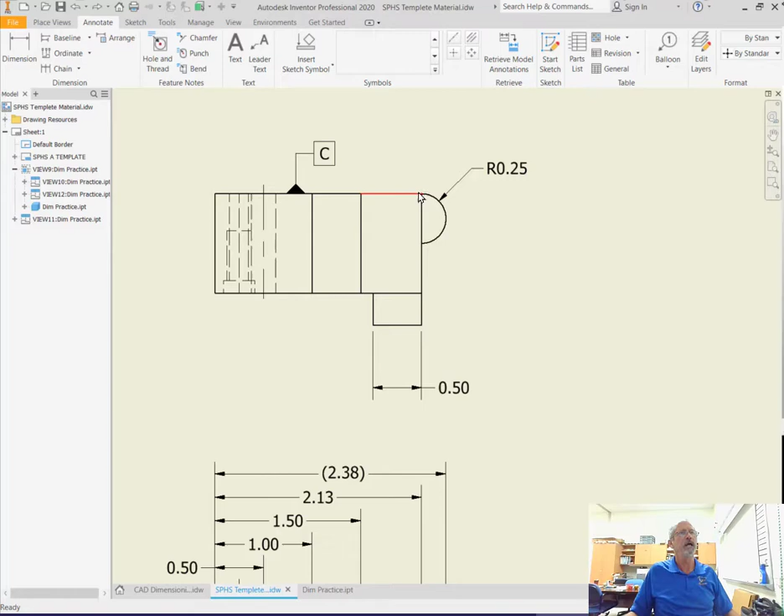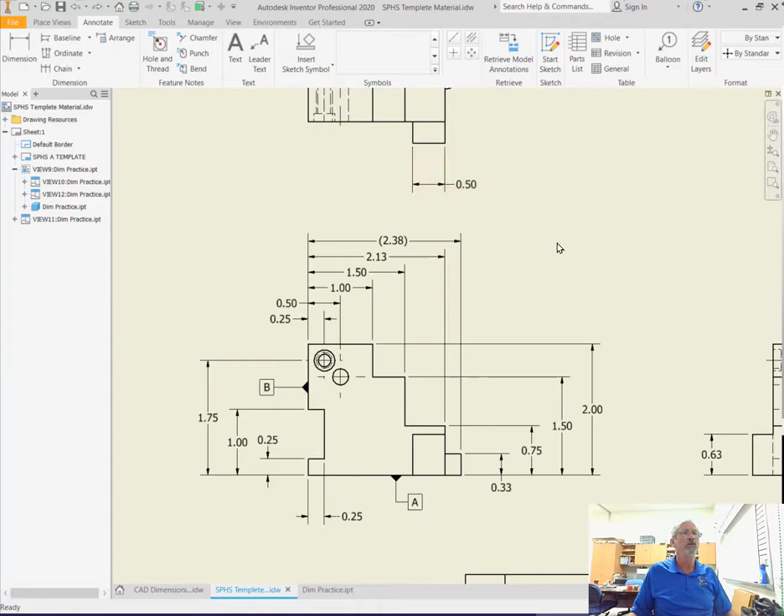Okay? All right, so now when we take a look at this, let's go back and double check all of our widths. We've got a width here. We've located the center both horizontally and vertically on both these holes. We've got dimension here, here, and here. We've got this dimension up here. So it looks like we've got all the widths. All right, so now we're going to go after depth.

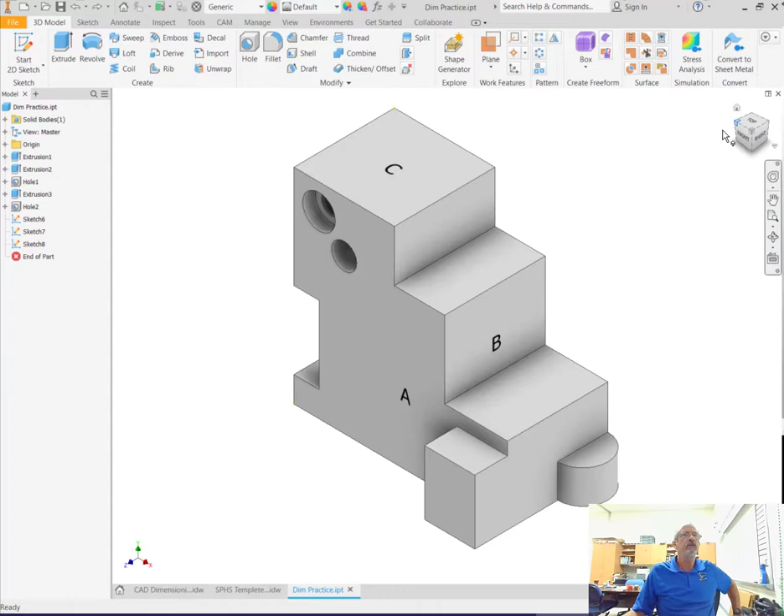Now for depth, we have to take a look at this and go, okay, which shows the best view here for our depth? Which shows the best shape and the best area to do our depth? Is it the top view or is it the right side view? Do we need a left side view? Is there any detail on that left side view? I think that when we went over to this left side, really there wasn't any detail that we had to get from the left side. So when we come back into here, we're going, yeah, right side and top view, that's all that we really need.

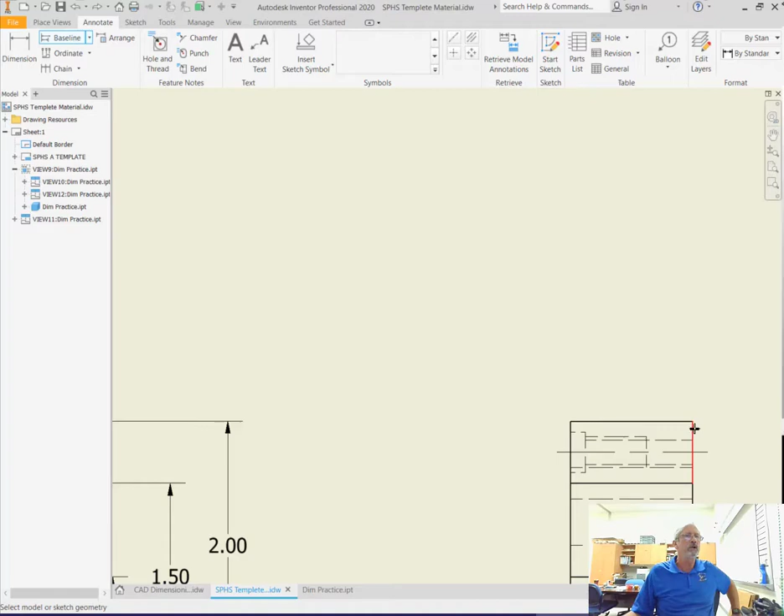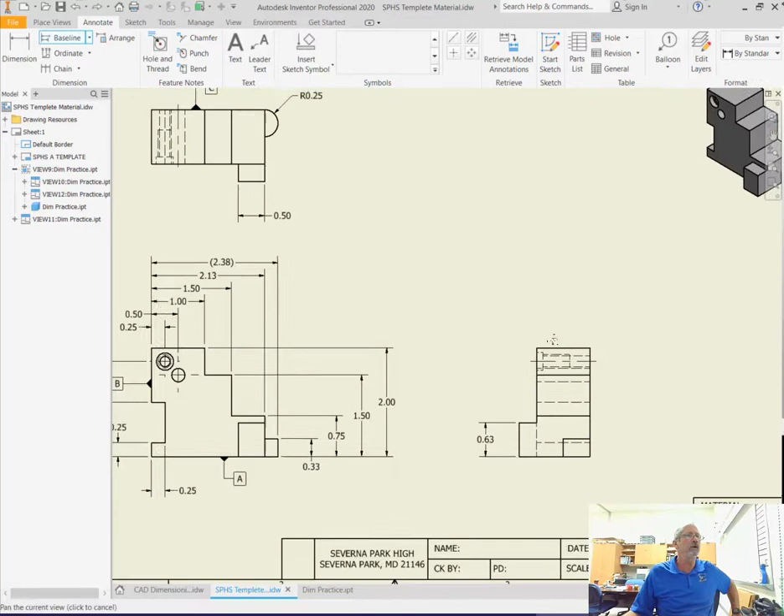And when we finish up with this, do we have all the information that is needed for this to be constructed? Because really that's what it's all about. Does the manufacturer have all the necessary information from us, the designer, to manufacture this piece with absolute certainty and accuracy? We don't want to get those late night phone calls that say, hey, Billy, Johnny, Susie, Debbie, what's the dimension? What are you really trying to do here? And that's what this is all about. So orthographic drawing, basic dimensioning 101, gave you a lot of information right there. I hope that you all got a lot out of this.